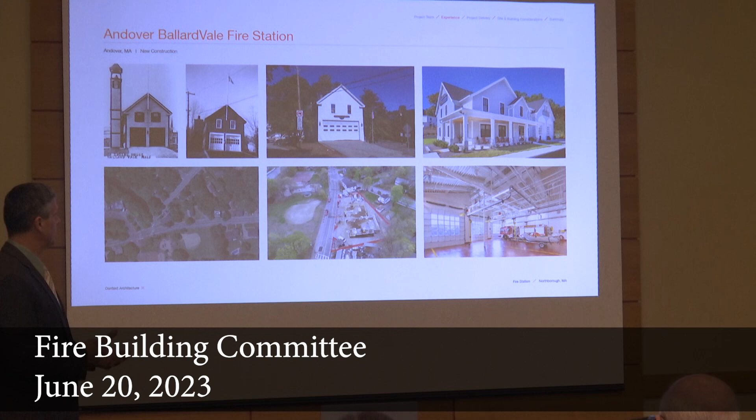So our main task and our main challenge was to design a new building that could house a modern fire station with all of the health and safety needs, as well as the firefighting needs, with now 3 bays for apparatus on a site adjacent to this site. And we worked very successfully with the historic district and the design review committee to collaborate on this design.

We actually did a few charrette sessions to come up with a design like this. The purpose was it was broken apart into smaller masses to help describe how a building like this might have gotten amalgamated together over time, but to help break that down and the massing down so that it fit better in the neighborhood.

The community absolutely loved it. It was fully successful at town meeting, getting all the funding and votes for the project, as well as through all of the committee hearings, and ultimately very accepted in the neighborhood.

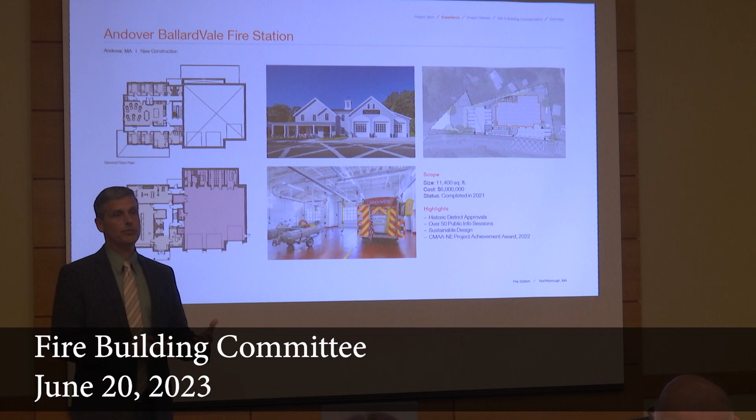It does include a training room for the department, which they were lacking space for, but that training room is also doubling as a community, or in this case, a neighborhood meeting room.

And for the town of Westford, we were hired to design a new fire headquarters, replacing the headquarters that was in the center of town. This is by 495 and Boston Road.

The direction given to us is that they really wanted this to become the gateway to the town of Westford as you approach it from 495. But they also wanted it to recall some of the historic structures in town, the old mill buildings, not too far from the center. So we designed a building on an old apple orchard.

It was a challenging site, very similar to the site you presently have, where it starts low at the road and it starts climbing higher and higher at the very end.

We're actually the second architects on this job. The first architect was hired to do the study and conceptual cost estimating, and the pricing was coming in too high, so they decided they needed to take a break and re-advertise the project.

With the interest of maintaining the same program but bringing it within budget, which we were able to do by creatively contouring the site in the back, doing some creative landscaping with trees and shrubbery to eliminate retaining walls, and building a little berm on the west side of the site to hide some of the dirt that we removed for the station.

We also had the challenge of a lot of ledge on the site. We knew there was some ledge, but as we started digging deeper and deeper, I think Westford is all ledge. So we were able to chop it, grind it, and actually create a new base for the building using the ledge, the stone on site.

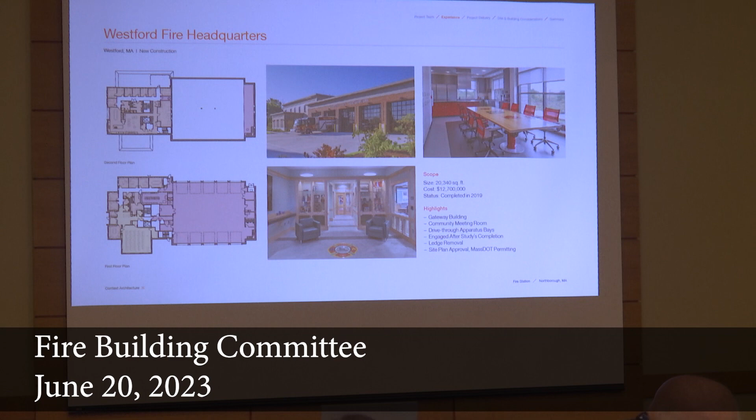We picked this up because it's so similar, we felt, to the program that you're looking at, the type of site you're looking at. The lessons we learned here we could easily apply and conform more to what you're doing in the program.

Town of Millbury hired us in fall 2020 to construct and design their new fire station headquarters. The current fire department operates as a mostly on-call staff, and they saw this building as the ability to transition to a career staff to address all the needs of their growing community.

This is another gateway building. The project is built on a corner lot along a main street that guides you from a highway down to the downtown area, similar to this particular project.

The site also had to go through a bunch of site remediation and improvements, including knocking down an existing defunct school, as well as lowering the site down to an elevation appropriate for emergency response. During design, the design team identified a bunch of ledge that during construction we had to deal with via blasting and hammering that brought that site down to the appropriate height.

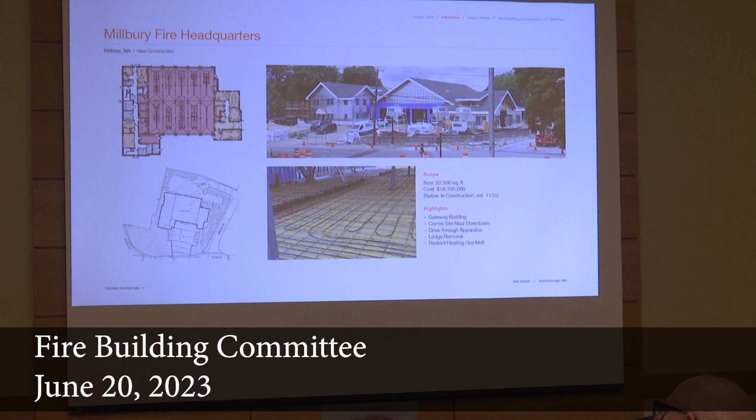This is a 5-bay apparatus bay, as you can see in the diagram on the top left. It's a drive-through site, as it's on the corner, and it has an EMS bay that services the back of the site. You can also see in one of these construction photos that they opted to go with some radiant heating in the apparatus bay. They also have some extensive ice melt in the apron that helps deal with all the inclement weather we're seeing in this area.

As part of this project, we wanted to share with you 2 project schedules. The first will deal with how we're looking at tasks 1 and 2 to get us to a spring town meeting in 2024. The second schedule looks at the same first 2 tasks. However, after the schematic design phase and the design development phase, we think it would be worthwhile to look into a construction document phase, and then a bidding phase, which will likely see the complete project cost by a special town meeting in fall of 2024.

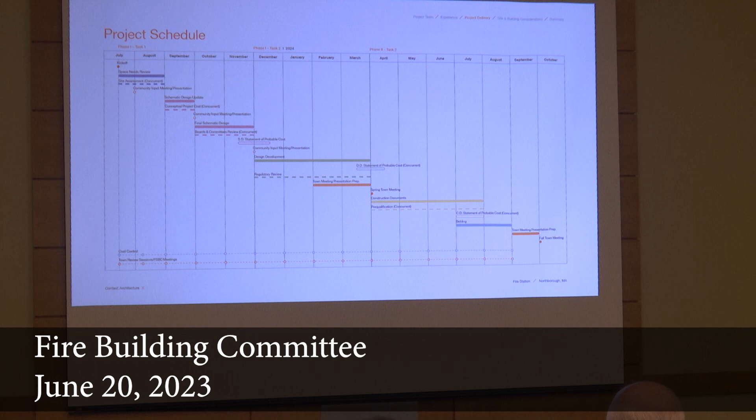So what we wanted to do with these 2 schedules was basically answer what was identified in the RFQ by showing how we're going to deal with tasks 1 and 2 via phase 1, but also looking at task 3 in phase 2 and being a little more responsible, showing those costs and getting a better idea of what the final project cost would be.

for the town. Context brings a high level of standard to all of our buildings. As Jeff pointed out, our buildings are not a particular style that we apply to a site. We actually tailor our buildings to the community in which they're built. But what I want to point out here is that this level of standard of service continues all the way through all phases of the project.

The very initial stages are critical because that creates a strong foundation. We collect a lot of data. We interview the key individuals. We work closely with the fire department. That information is pulled together and assembled into a very strong space needs assessment that's vetted numerous times. That has information as far as square footages, what the spaces contain, and the adjacencies that are important. It also begins to set up degrees of priorities, and if we have to talk about phasing, we bring that into the conversation as well.

This all leads into some of the more specific parts of the design that we believe are also important to bring up in the early stages, one of which is energy conservation and efficiency. Along with our consultants, we'll be presenting to you and looking at different types of systems that could be used that would be well suited to your type of building. It's a 24/7 operation, so that really sets the standard for the type of systems that might be best. We have a lot of experience over the last number of years working with different programs, Passive House, obtaining

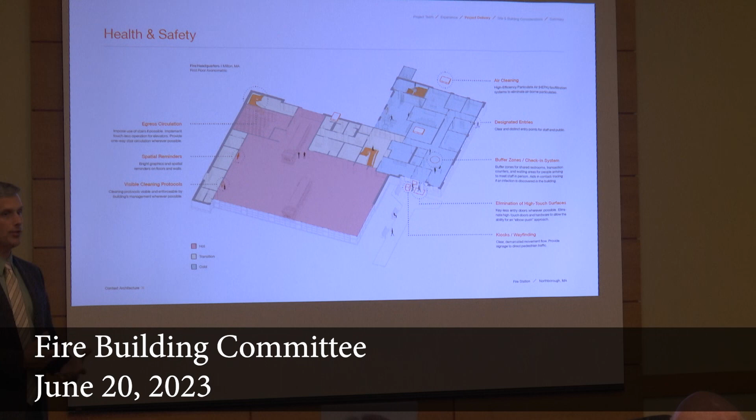But in particular, the second aspect of the design I want to focus on is the decontamination area. We focus on the middle area there, where we go through a bulk decontamination of gear, bunker gear, and equipment, with spray down areas where your washers and dryers are. Then we go out of that into an area that's personnel decontamination, with showers as well as enclosed lockers. It's really important that you exit into the clean area of the building, not back out into the hot zone. It's a real clear sequence, very easy to do in new fire stations, very hard to do in existing buildings. But it's something we take a lot of pride in getting right for every single station that we do.

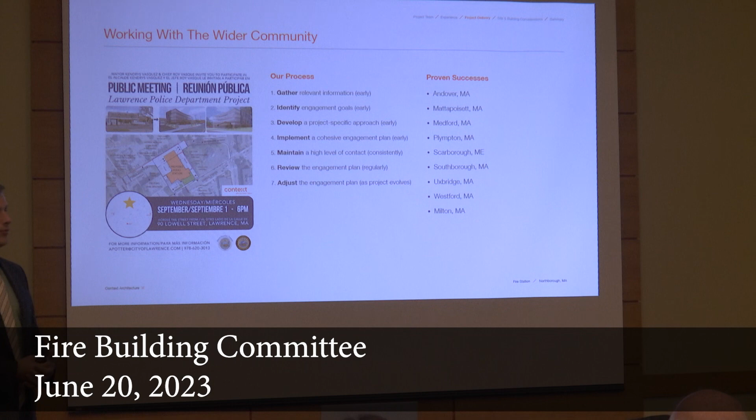Another thing we focus a lot on during our design process is the community aspects of the building, or getting the information out to the community. I led the presentation of the Andover station illustration. In our practice, we do a lot of community outreach and public information sessions as needed on a project to make sure the facts are available to people, that they understand what the project is about, the need for it, as well as why it costs as much as it does, and why the fire station needs to be a certain way. It's been a really successful approach in the past, and we'll be looking to have great discussions with you about the level of integration of the public into the process.

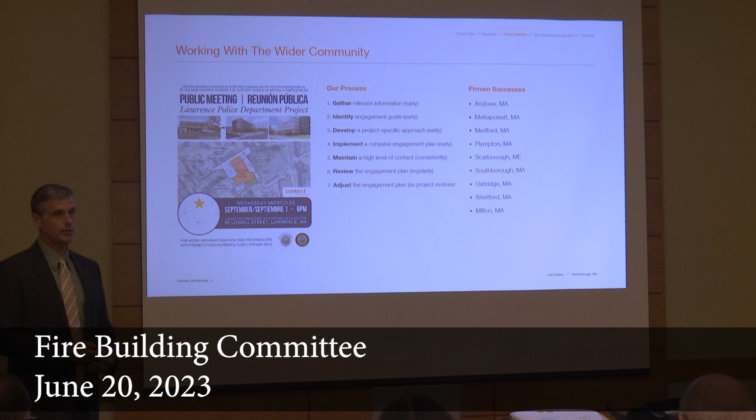One of the more interesting aspects of this project is the proposed site here in the downtown area. As you can see, we're identifying the existing headquarters, the proposed site, as well as the downtown area. We feel this is another one of those gateway buildings along Route 20 that leads you into the downtown. It's also interesting because, as we talked about earlier, we see this as one of the first few projects in re-imagining and redeveloping the downtown.

Steve's going to talk a little bit about the site features. The site is a 3.5 acre site. It's been previously developed. We'd be looking to occupy a big part of the existing development, but to fit the program we would need to cut back a little bit into the hill. So that's one of the site constraints.

We've worked on a number of sites, doing earthwork calculations my entire life. So what is the best balance of cutting into the property, limiting the amount of trees and earthwork being done, balanced with potential smaller retaining walls? How does that fit into the budget? We're aiming for minimal earthwork and minimal building in order to accommodate what we'd be looking for in a schematic and then a site plan, a site layout.

The other constraint on the property is obviously that this is Route 20, it's a Mass DOT property. A couple things we'd have to take into account are really the access, making sure there's safe access for the fire department in and out, as well as for the personnel and staff.

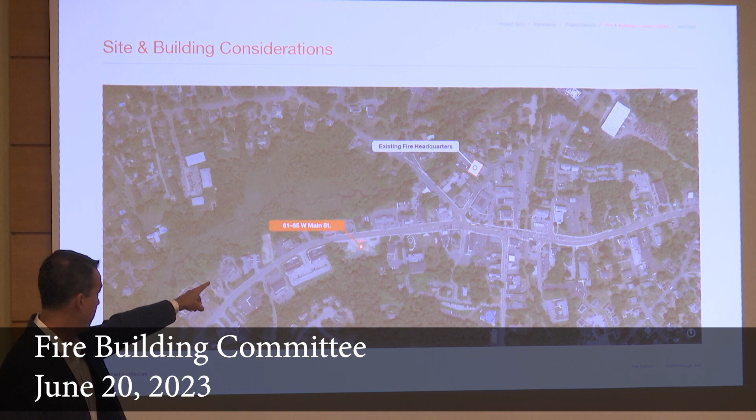One of the challenges we want to look into is that bend that goes to the left, to make sure there's a proper sight stopping distance. Whether or not that involves a traffic signal will probably have to be discussed with Mass DOT.

So we'd be looking at access permits, a utility permit for connecting into Route 20, and a potential traffic signal. There's also some wetlands to the north, a perennial stream. We're far enough away that we might touch on the riparian zone a bit, which would be a conversation with the Conservation Commission. But I think those two site constraints are the big ones we're focused on figuring out how to address.

We're also prepared to share three different site schematics, or concept diagrams, that we've looked at for laying out the project, as well as massing diagrams to imagine how we'd like to fit the building into the surrounding context. This first option is roughly the same layout identified in the RFQ.

It's kind of worked through in the feasibility study. However, we felt we've made some improvements and wanted to adjust the layout. In every one of these layouts, the goal is to move the building as far east on the lot and north as possible, to get it away from the sloped area in the back, so we can limit the amount of work needed in site improvements.

Also, one thing we did was take this training room off the main street so we could have adequate viewing from the apparatus and apron area around the corner, which we identified as a potential issue.

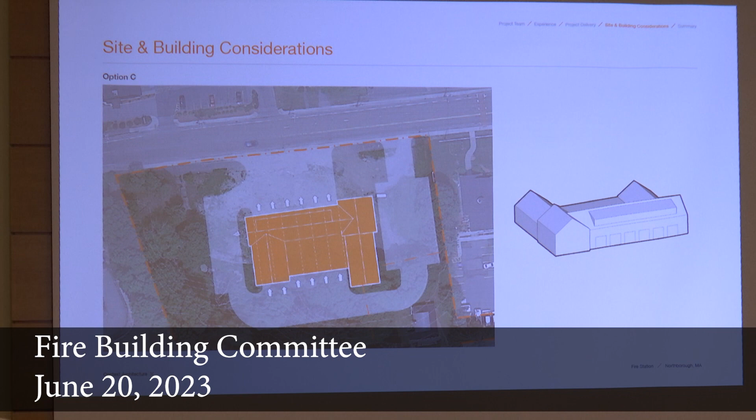So in conclusion, we think we have the right team for this project. We have a lot of experience, particularly doing responsive fire station design in communities that need a designer to come in and create something that responds to that need. Given that this building is going to be somewhat like a gateway building, we think that's the need here - not just a fire station, but we also know how to do fire stations correctly, making sure they're healthy and safe for firefighters, designed appropriately, with all the training features built in.

We didn't really touch on that, but we're happy to talk about it in questions. We are very good listeners and responsive to the communities we work in, and would be excited to work on this project with you. So with that, I'm happy to turn it back over to you for any questions and comments you might have.

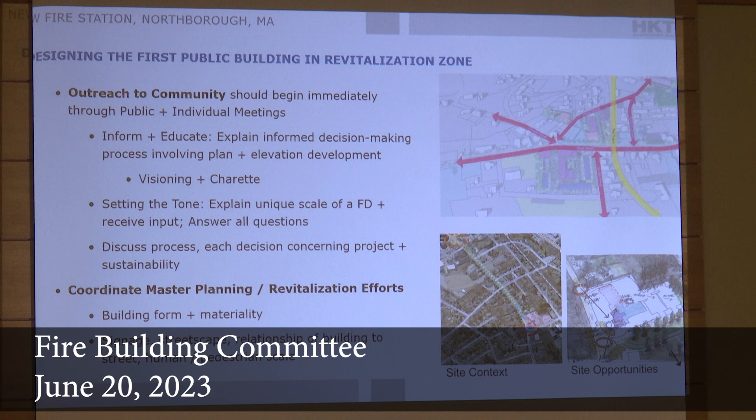We discuss the process, and then coordinating the master planning and revitalization efforts to make sure that that's happening, and they're talking about things like form and materiality and signage and streetscapes, and that we're all talking together on projects. So we think that's really, really important.

And then when we're doing public buildings, we always look at what you have. We don't even have any of your schools on here, but these are public buildings and the neighboring buildings along the street. We review your local architecture, buildings in the public domain, buildings that reflect the neighborhood, what is the development along the downtown areas.

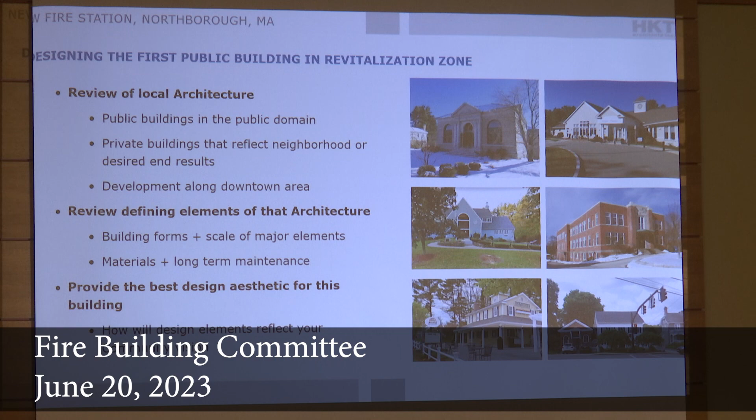We review the defining elements of the architecture and then provide the best aesthetics. We picked the two bottom pictures because of the scale of the building on the left, with the porch and the dormers and things like that—how can that relate to a fire station? And the picture on the right shows three styles of architecture jammed next to each other, which is what your town looks like along that structure. So we thought those were not just standalone buildings that define your town, but the other architecture along the way. I'm going to turn this over to Lance.

I'm with Pare Engineering. We handle the civil engineering components of the projects we've been lucky enough to work with HKT on for many years. One advantage we have is that we're comprehensive engineering—civil, structural, environmental, geotech, traffic, and permitting. We do all of that in-house, and we've been providing these services with HKT for many years. The more consultants you have on a job, the more constructability issues you often have when you get into the actual construction itself. So this is a value add we provide to the HKT team, to really consolidate those services together.

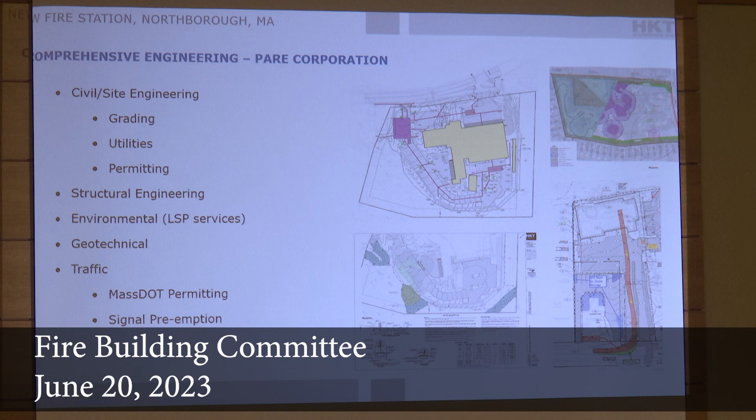How we typically evaluate sites when we move into them: we evaluate from an engineering standpoint, of course, best management practices, but we also look at operational issues and maintenance issues—how it's going to be maintained as you move along.

I was formerly a DPW chief who handled a lot of the maintenance on these types of buildings—not only the buildings and surrounding areas, but also the traffic signals. How's that going to work? I saw a lot of issues when you guys are preparing to go out for a fire—the traffic signal usually isn't the first thing on your mind. So understanding how that operates, whether it's operational, and how that's going to impact the safety of you folks and the town. The last thing I wanted to point out is future planning.

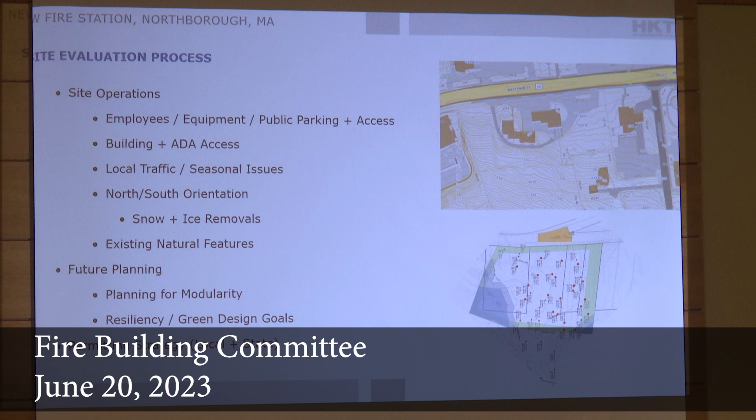It's really important on these sites—you only get this one time, and you want to plan for the future: modularity of the building itself, and what might come down the line on the rest of the property. When we're looking at these designs, we don't like to pigeonhole you into something and preclude future development, unless that's something you've already identified, saying no more development will ever happen back here.

This particular site is pretty interesting, as you know. The big hill behind there is going to probably present some groundwater and ledge issues—we can already see that up front. In addition, the big hill with the vegetation on it might be a little tough for solar installation, we think. So evaluating that green design and how that's going to work, we're going to really take a look at that—maybe geothermal is a better approach at this particular location.

One thing I wanted to mention is traffic. MassDOT can be a bit of a challenge sometimes—if anyone's worked with MassDOT, in terms of project length, we come together at the very beginning of the project and put a permit strategy in place together, so we can facilitate not only the design but also the permitting, making sure it goes through. We've put a lot of signals on fire stations on MassDOT roads, so we have a pretty good handle on what's required there. The last thing is how the preemption is going to be handled with some of the local intersections—we know you have an emergency signal out on Church Street now, and how is that all going to interact with this site being only about 700 feet away?

So I'm going to turn it over to Amy next.

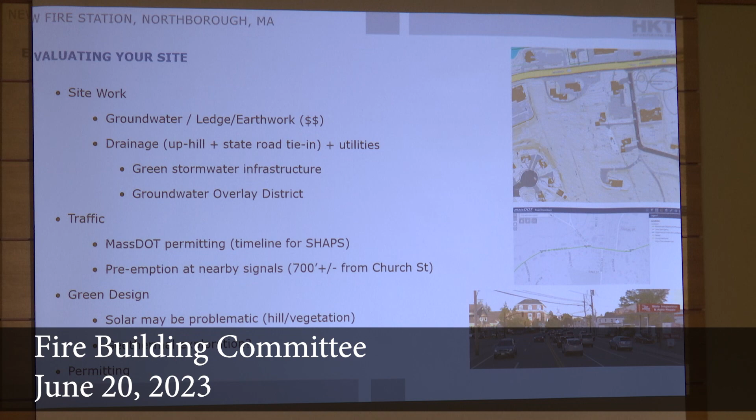So while Lance is getting going on the site evaluation phase, we're going to dive into confirming the program. We know that you did do programming in the last study, but it's been a few years. We think it's a good time to confirm what was done, see if there are any changes. For us, programming is really important to get a good, solid understanding of your operations. We've done fire stations all over the state. They all have very similar parts and pieces, but how it's all arranged to work with your operations tends to be unique from station to station. Everybody operates a little bit differently, and if we can really understand your operations, your workflows and your processes, that's when we can create architecture that's responsive to your unique operations and something that's really going to work for you. That's our goal in the programming phase.

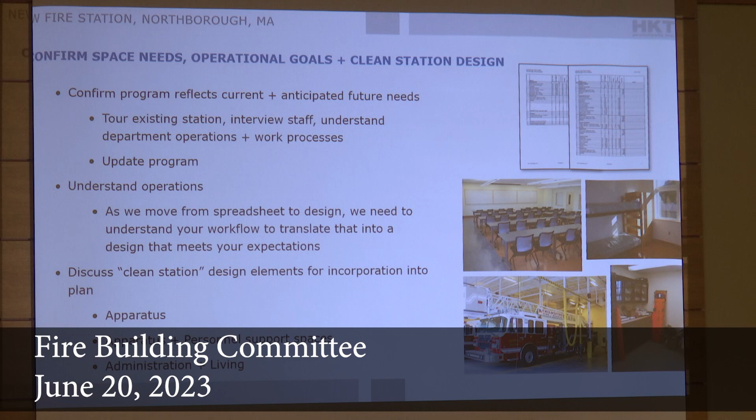At the same time, we're going to start to talk to you about clean station design. We've been having lots of conversations with departments about this recently. We have an example we'll show you, something we've done recently with another department. It means a little bit different to different people. It's all about the contaminants, making sure they don't filter through the building, but it's also firefighter health and well-being benefits - getting natural lighting, healthy materials, access to views. It's a very stressful job, so making sure you have visual breaks and places to decompress is really important, and that all gets wrapped into the clean station design element.

We'll be looking at best practices to make sure we can keep those carcinogens away from the living quarters, away from the working or administrative quarters within the fire station. We're going to be working with HVAC engineers to make sure we have a pressurization that helps that. It's also operational - we need to make sure the operations for your department and how you move through the spaces matches the architecture we're creating, so that all these systems we put in place actually work.

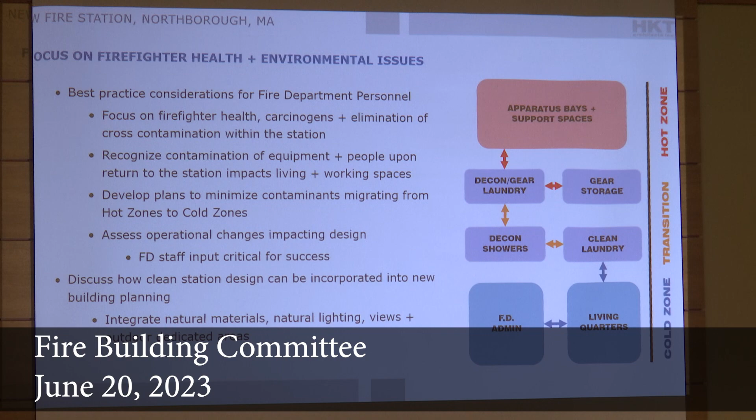This is an example of a project we just finished recently - the Ashland Public Safety Building. We worked really hard with them on these elements of clean design, and you can see it through all the bullet points. It's a combination of both architecture and operations - making sure you wear PPE on the site, making sure the trucks are always hooked up to the Plymovent system, that you do vehicle checks outside as much as possible. So there are operational components as well as the architecture.

The red are the hot zones, the green are the cold zones, and the yellow are the transition zones. You can see from the blow-up plan below that we really spent a lot of time working with them to figure out how they were going to flow through these spaces when they came back from a call with contaminated equipment. Where were they going to go first? Where were they going to decontaminate their bodies, their equipment, and how were they eventually going to get their way back up into the rest of the building?

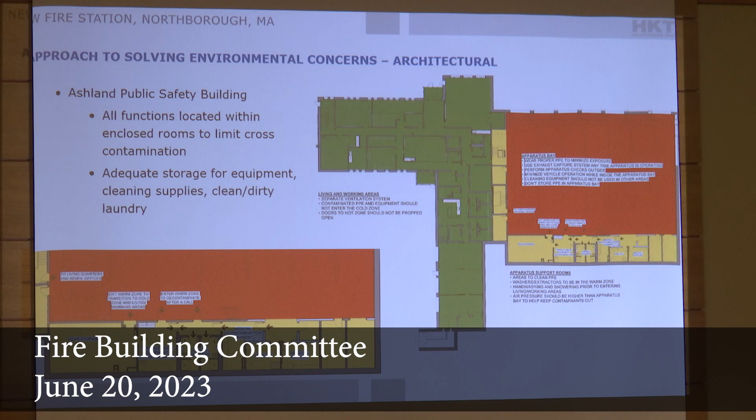All of this is so critical, but we also have to make compromises. In the case of this building, we were setting the building into a hill, and there were certain limitations for the architecture because of what was going on around it. So we have to have those conversations with you about what's most critical, what can we do, what can't we do, what compromises are we going to make. I'm going to turn it over to Don.

Thank you, Amy. So GGD would be the project MEP - mechanical, electrical, plumbing, and fire protection consultant. We would work as part of an integrated design approach with HKT, which we've done a number of times and really enjoy. One of the goals we focus on is load reduction, because if we can reduce the building heating and cooling loads, we can hopefully provide a smaller system that's going to come in at a lower cost.

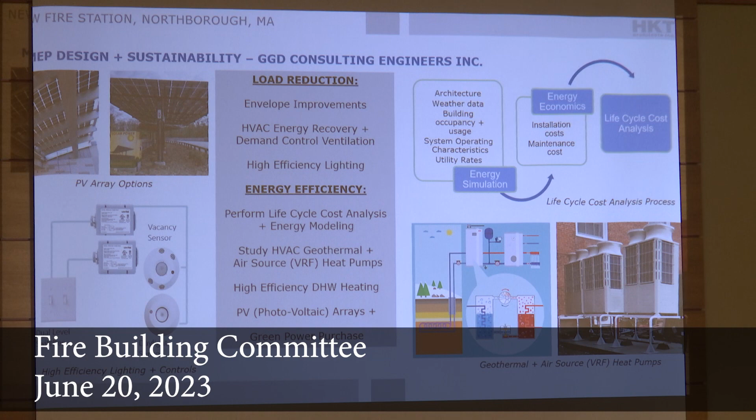We do that through high performance envelope design that we inform HKT on by using energy modeling, so we can study different envelope options as well as different HVAC system options. Some of the HVAC options we look at, especially nowadays, are air source and ground source heat pumps, which are electrified heating, air conditioning, and ventilation systems. We also use high efficiency lighting systems to reduce that load. Anytime you can reduce load, you can reduce equipment sizing and costs. We want to make sure the systems we propose are reliable, have been used and have a good track record, are highly efficient, and have good indoor air quality.

As Amy mentioned, we create different hot, neutral, and cool zones through good HVAC ventilation design and pressure control, making sure those zones have proper pressurization so we're keeping any contaminants and pathogens from the apparatus bay away from the living quarters. We do that through use of the building management system as well as testing and balancing.

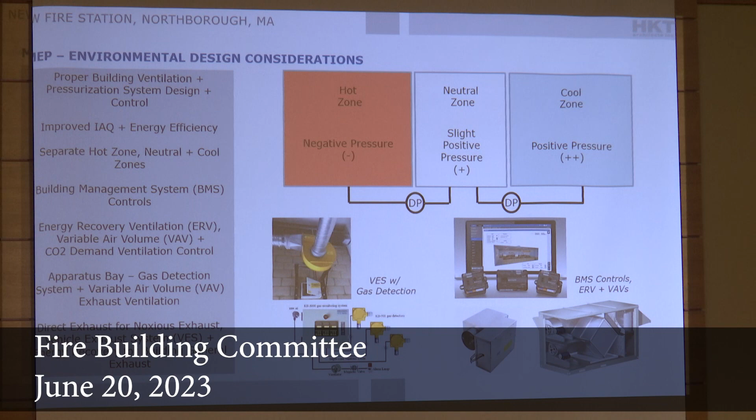We still keep an eye towards energy recovery where we can in the living quarters, so we remain an energy efficient design. We use VAV and CO2 demand, but in the apparatus bay we have vehicle exhaust systems that capture those particulates. And with that, I'll turn it back to Amy.

Sustainability is really important to our firm, and to so many of our clients these days. We've done lots of different sustainable projects at different levels. It's something we talk to our clients about, what's important to you. We've done LEED projects, net zero projects, fossil fuel free projects, and projects where we plan for the future to incorporate all these things. We'll spend time with you during schematic design to figure out your goals and what's possible, look at the options and the cost of different things, so you have the information you need to make informed decisions about what you want to incorporate.

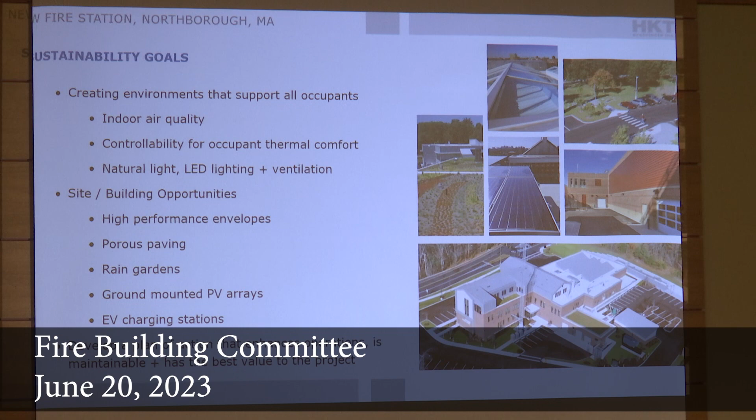What's most important through all of this, in our opinion, is not only being a good steward of the environment and keeping energy costs down, but making sure it's a good, healthy environment for the people who live and work there. So we'll work with you on that.

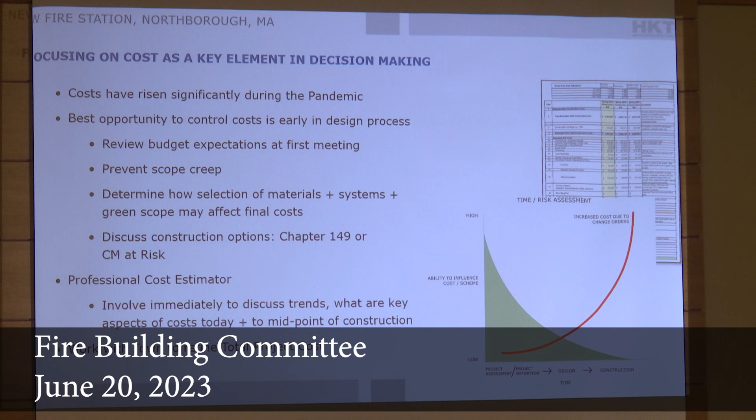I'm just going to talk about why HKT, because this is our last slide, wrapping it up. So we talked about partnering and communications and collaboration. That's what it's all about through the whole project, talking with you about all the elements of your project, from the site issues with the hill, the clean station design, which is critical, how sustainable you want the project, what's your budget, all those things. We work with you to come up with the right answers for your town.

We think we have the right team. We have the expertise, we are creative people, problem solvers. If you notice any of the architecture in our projects, nothing looks the same. Every town has a different design, so we don't do cookie cutter. We're really responsive to what they want.

Our references hopefully will tell you that we listen to you and respond to their goals and concerns. And we're looking for a thoughtful architectural solution for your community. And we have to make the chief happy that the building works. That's the most important, and it's really important.

If the plan doesn't work for the fire department, it doesn't work at all, even if everyone loves the architecture. So we always say that. And I think together we can achieve that balance of functionality, budget, and architecture.

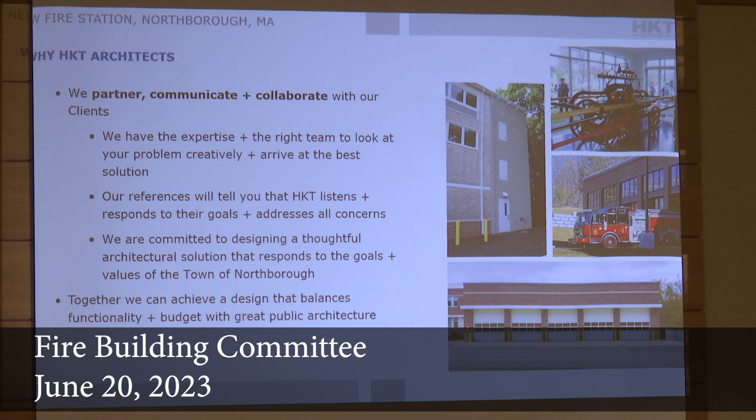First of all, if you saw me grinning when you put the hose tower up with the clock - Captain Brillhart's been bugging me since we started this, he wants a clock on the hose tower, and he's going to be retiring probably as soon as this building's done. His job will be to wind that clock if we put a clock on the hose tower. And he wants a ring around the outside, so it's red for a fire call. We put a town seal on the third one, and then the clock.

That's neat, but I love the idea of a clock, I think that's really unique. And I loved your comments about the healthy station - I think that's very critical, at least for me it's super critical. And you recognize it's not just the physical aspects, it's also the mental aspects.

We actually created a patio out behind our current station, strictly as a place for the guys to go to decompress if they need to. We have enough crappy calls, you need every now and then some place to go. We don't have a place inside because everywhere you go, there's somebody else there, right?

But more importantly, and you had mentioned about the looks of the building, because that is critical to many people in this community, you understand. And you mentioned about the functionality that the fire chief wants - how do you make those work together? Because as soon as you start making things pretty, they get expensive, right? In my opinion, maybe not.

But when we want it to look nice, I mean, maybe arched doors, the bifold doors, the really neat doors that open sideways and a few other things - how do you get functionality and looks and keep it from being outrageously expensive?

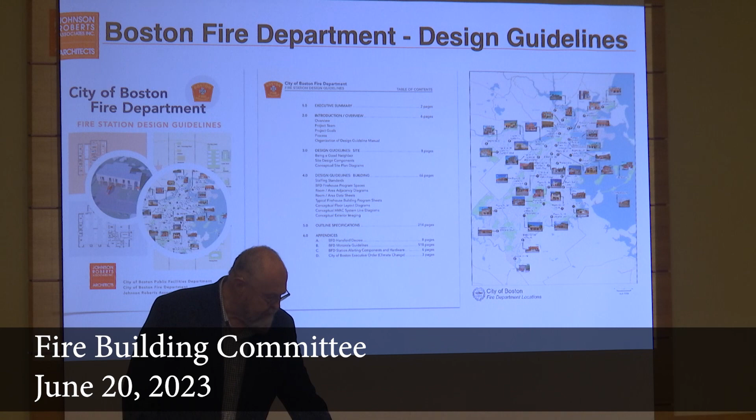But this is a big station. This is 25,000 square feet. I don't remember the exact square footage, but it's about the size of what you're talking about. Big station for that neighborhood.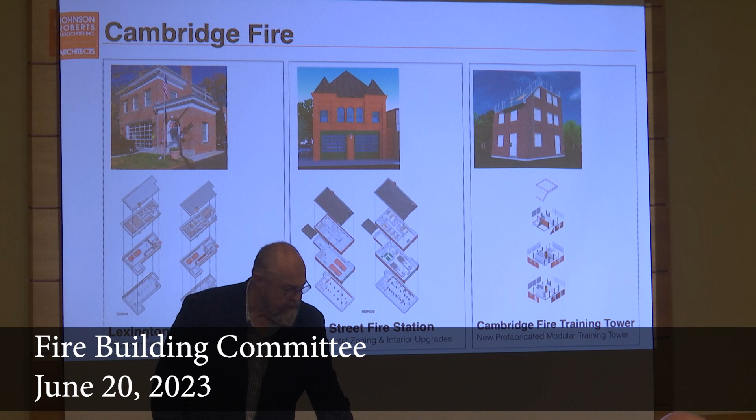Okay, just to talk about your project a little bit. I think we have a good start. We worked through—last time we spent a lot of time. Boy, did we look at every site in town. We looked at everything that was possible, and ultimately settled on this site.

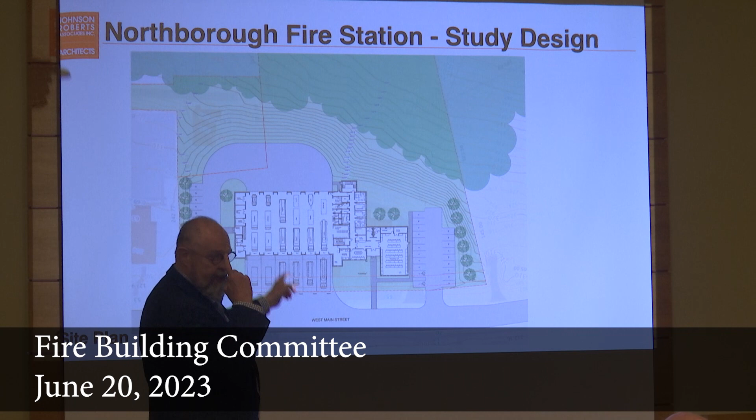It's a great location. It's not without some challenges—it's got some grading issues, but we were able to come up with a plan. With the addition of that extra piece of property in the back, we'll be able to do drive-through bays on the facility. So I think we came up with a pretty good site plan. I think it works pretty well.

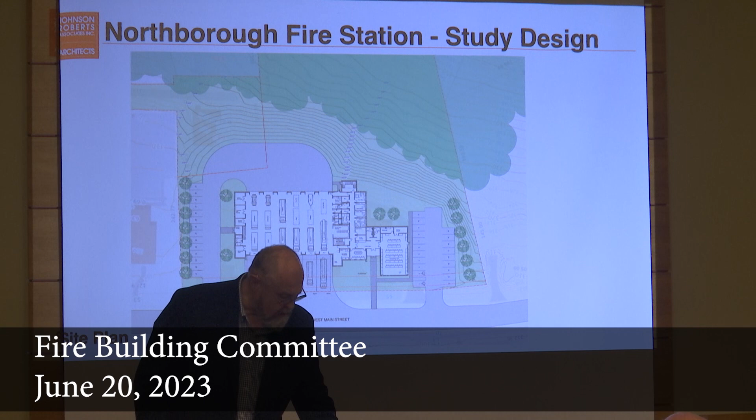I think the floor plans probably also work pretty well, but we recognize it's been 5 years. There could be some things you might want to do a little differently—you might have thought about it for a while and decided you want to change something. So the first thing we want to do is really take a look at all of those kinds of planning issues.

I can tell you, doing public work, we often do projects where we'll do a design—probably what happened exactly with the library. You do a design, and it takes a while to get funding. When funding comes through, you roll it back out and look again, and you may redesign it.

So I know that this building—the design that went into the Massachusetts Board of Library Commissioners—is different than what was built, because after time goes by, we were able to go back and take a look and come up with some maybe better ways of accomplishing things. And we would expect to do the same thing with you guys.

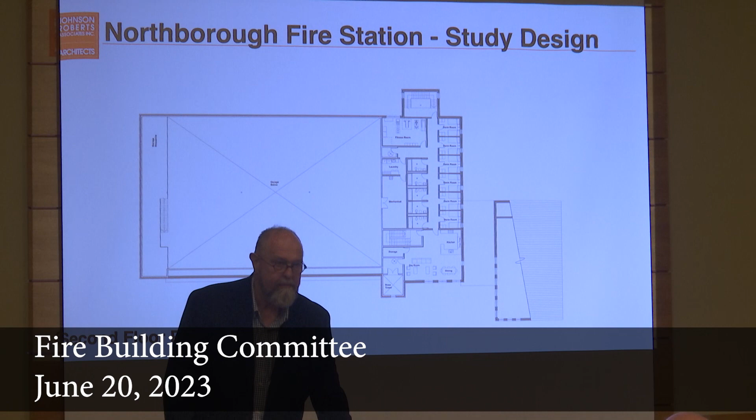Just a second floor, sort of a two-floor concept. You're all familiar with these plans. So really proof of concept too. We know it works, we know the site will work. Yeah, now it's time to actually design something.

Now, we spent a lot of time on the site planning, the design, site selection. We didn't spend very much time on the exterior, so we kind of needed something at the end of the project, and this is what we came up with. But we understand that the town is interested in doing something that may have a little more traditional look, and if you look at all our work, that's really what we do. So we're very open to going back in and taking a look at that.

I think given the basic planning, we have a series of buildings. There's one building that's the training room, another that's the quarters, another that's the bays. We have a tower. I think there are lots of different ways that we can treat those in terms of massing and materials so that we can do something that's going to be appropriate for the downtown. It will be a signature building in the downtown.

It's going to be part of what will kind of define what people think about when they think about Northborough. It's, like all public buildings, people think about those. That's part of what the town is. So it's important to get that right.

And we certainly want to have public input into the process. That's really part of what we do. Having specialized in public work for as long as we have, I would say we have a very collaborative working style. We like to look at as many options as we can and come in and get feedback, because we may know how the building ought to go together, but you know your community and you know what's going to be appropriate for your community. We want to make it right for you. So we really do need that process, that back and forth, to make sure that we get it right for you.

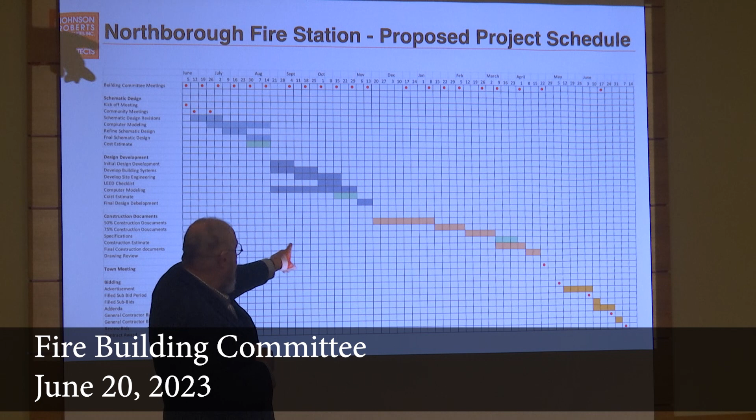We think we need at least a couple up here in this initial phase, because that's really going to determine the direction of the project. And then we probably need to have maybe another one down in DD and maybe one or two down in the construction documents phase. But we'll leave that to you.

We see our job, it's not just to hand you a set of documents. It's to do whatever we can to help you make the project a reality. So we've done all kinds of things. We've done electronic media, 3D models, fly-throughs, interior, exterior. We've done public presentations, we've done cable TV programs.

I did one program where I went into public schools and presented a library, and that was to get kids excited so they go home and talk to their parents. So we kind of look to you to tell us what's appropriate for your community, but we are really happy to do anything that needs to be done to help promote the project.

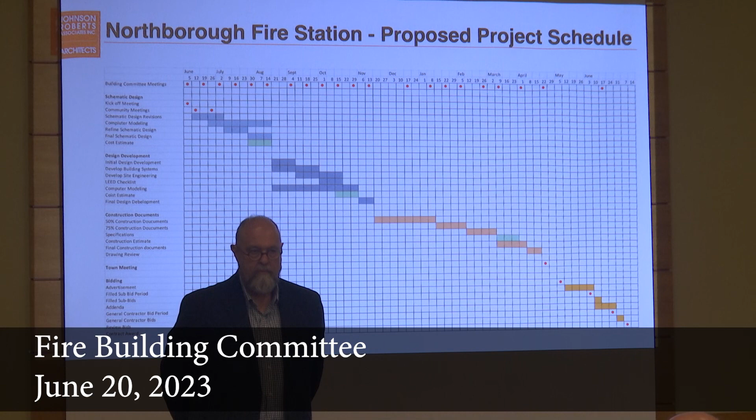Chief? I know you're familiar with the hot, warm, cold zone. We've talked about that a lot. What we didn't talk about was the mental health aspects. Is that something you guys have worked with? Places for firefighters to have downtime where they can not be locked in a box and stare at the wall. Yeah, that's a good point.

We'd be happy to explore that with you. We recently just did a proposal for a facility that was actually a counseling facility for first responders who'd been through traumatic issues and needed to have some counseling, and that certainly was very heavy on that kind of thing. Well, not just a proposal, we went through the beginning of construction documents.

Yeah, so it's a wonderful thing that you bring up. It doesn't get talked about a lot, and it needs to. Just like when we were working with you in 2018, 2019, Healthy In, Healthy Out was something that not many people were talking about. So, and this is along with cancer, suicide is huge. Yes, and a lot of that is because of the fire service's tradition of suck it up and get along.

I mean, that's the way it is. Yeah, and we've gotten much, much better at that, but it's something we need to consider with the new station coming along. How important that will be.

How does your schedule look? You guys have a lot of projects, because you're not a huge corporation. You've got 14 people, do you have the time to do our project? Absolutely. We've actually turned down a couple things that have come along recently because we're hoping you'll select us. We've been trying to keep a slot open for you guys because your project is important to us.